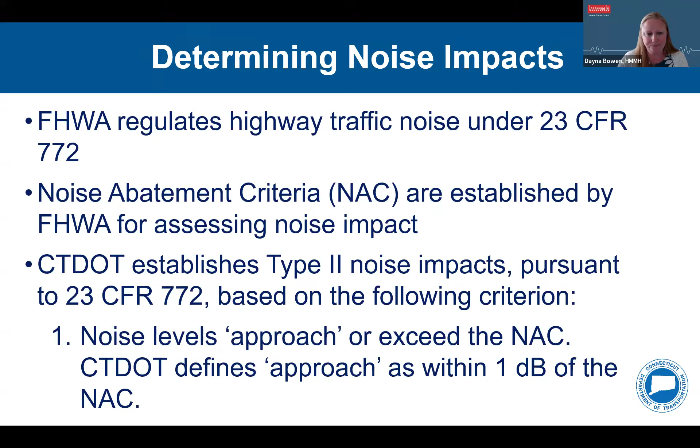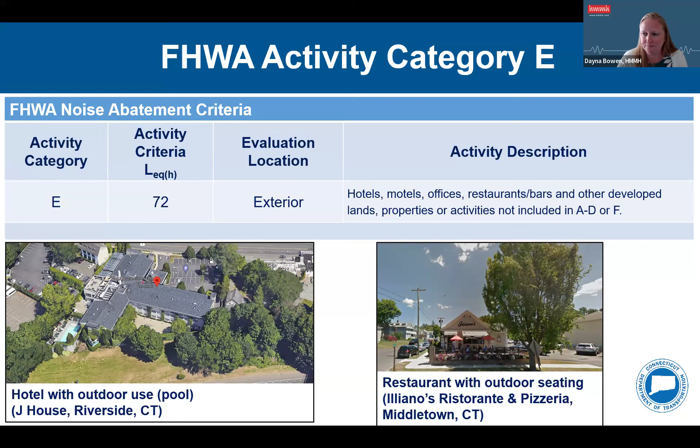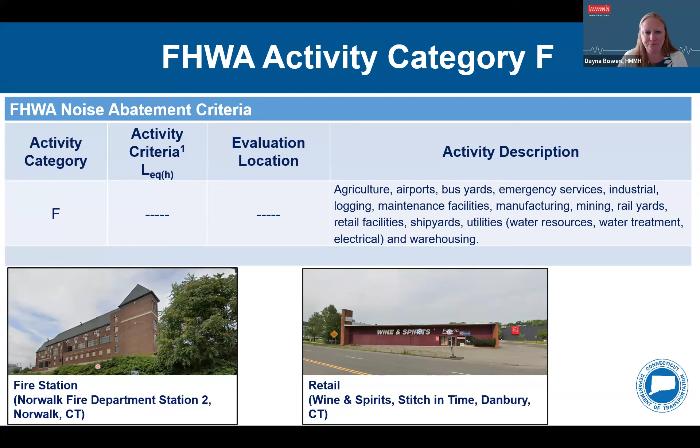Okay, so now I'd like to get into the details of the analysis. So what is a type 2 noise analysis? Federal highways revised their federal traffic noise regulation to allow for the control of noise along existing highways. Noise abatement that's constructed along existing highways is defined by federal highways as a type 2 project. Type 2 projects are not permitted on roadways that are already scheduled for a type 1 project or on roadways where a type 1 project has already been conducted.

A type 1 project in general is one in which there are roadway modifications, whereas a type 2 project does not include roadway modifications. To implement a type 2 project, a state first needs to conduct an analysis to identify locations of existing highway noise impacts. The intent is to then use the results of the noise analysis to identify a priority list of type 2 project locations. The priority list, as well as available funding and FHWA approval of the priority list, is required to then initiate a type 2 program.

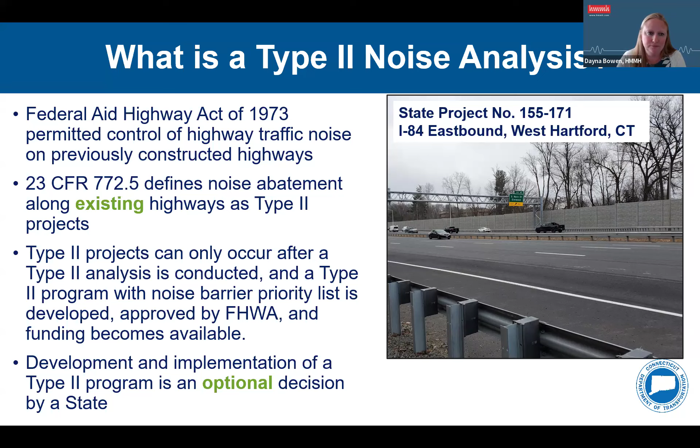FHWA does not require the development and implementation of a type 2 program. It's a strictly optional decision by a state to identify and address existing highway noise issues. Anna?

So here we see a timeline of the history of the type 2 program for Connecticut. A study was conducted in the 70s. The state was then able to move forward and implement a type 2 program. This previous program was suspended in the early 80s due to funding. Then with new legislation that was passed, it reopened the program for a few more years. It was then suspended a final time due to lack of funding. This program is now outdated, which leads us to today, presenting on the new updated analysis the department conducted.

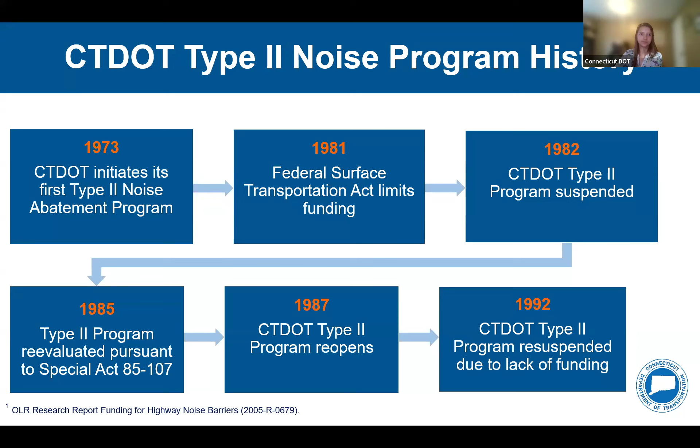Okay, so the department provided the consultant team with a list of 38 principal arterial highways to be included in the type 2 noise analysis. Principal arterials are generally roadways that serve through traffic and they have limited access. The list is generally comprised of limited access highways where highway traffic noise abatement could potentially be constructed. Local roads with numerous access driveways make an effective noise barrier very difficult to construct because of the frequent gaps necessary to maintain access. A noise wall needs to be continuous to effectively reduce noise levels.

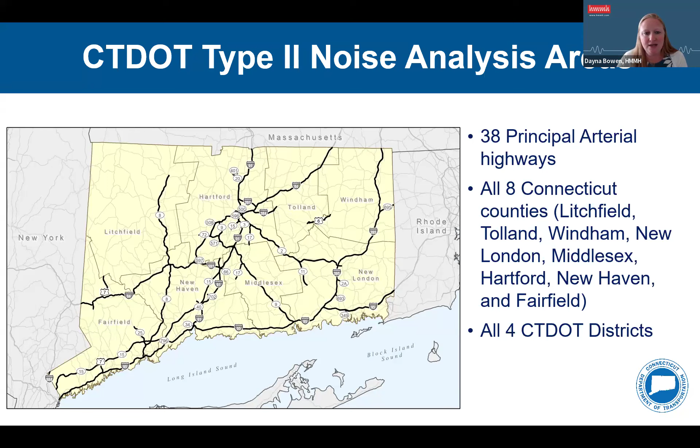The next slide provides a graphic demonstrating noise barrier length requirements to help understand. As a general rule of thumb, we like to say that to provide sufficient noise level reductions for receivers, a noise barrier should extend at least 4 times the distance between the last receiver and the noise barrier. That's just a general rule of thumb. You can think of noise barriers with multiple gaps for access driveways as short barriers that are not long enough to sufficiently block the highway noise.

So let's get into the noise modeling. Noise modeling was performed to evaluate existing highway noise impacts, as we said. And as we'll explain in the next few slides, the statewide noise modeling is preliminary and simplistic.

Specifically, the model does not account for changes in terrain, shielding from natural sources like hills and man-made sources like buildings. Standard lane widths of 12 feet per lane were assumed, and all lanes in a single travel direction were modeled as one roadway with a roadway width equal to 12 feet times the number of lanes.

It's also important to note that this simplistic modeling approach was taken due to the statewide scale of the project. Each site identified on the type 2 priority list will still need to undergo a more rigorous noise analysis.

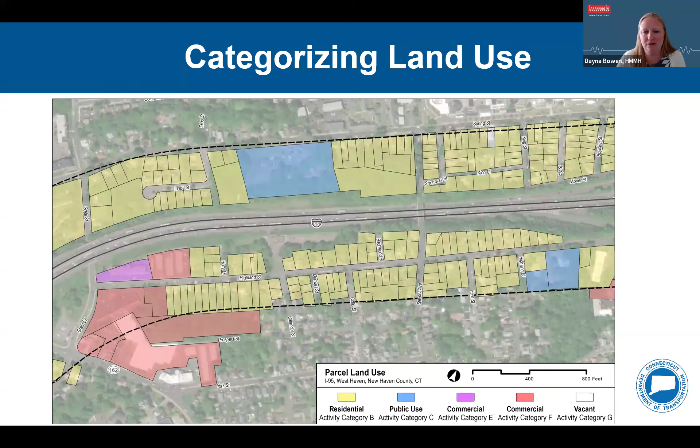So noise measurements were conducted in a total of 36 locations in the type 2 noise analysis areas. Locations selected for monitoring are intended to represent a good sample of the entire noise analysis area, covering a range of different roadway types and source receptor geometries.

The intent of the noise measurements was not to identify existing noise levels everywhere, but rather to obtain sufficient information to create a simplified or valid flat earth noise model approach and confirm that this flat earth model had an appropriate degree of accuracy so that it could be used to then identify existing highway traffic noise levels at all noise sensitive land use within the type 2 noise analysis area.

A flat earth model assumes that the roadway and noise sensitive land use are all at the same elevation and that there's no objects to block the view from the noise sensitive land use to the highway.

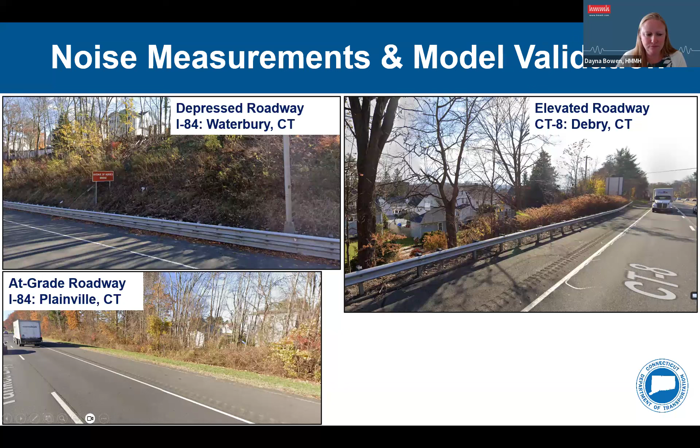So to help validate our flat earth approach, traffic volumes and vehicle classifications were counted during our noise measurements. The flat earth model included bidirectional roadway center lines and bidirectional traffic volumes classified by vehicle type, as well as posted speed limits. The vehicle types used in the traffic noise model include 5 types. We have autos, medium trucks, heavy trucks, buses, and motorcycles.

Whereas medium trucks are vehicles such as FedEx or UPS vehicles, as well as pickup trucks with the extra set of back wheels like dually pickups. Those are class 5. Heavy trucks are tractor trailers and other trucks with 3 or more axles, which includes classes 6 through 13. Buses can include commuter buses and school buses, which are class 4, and then motorcycles are class 1.

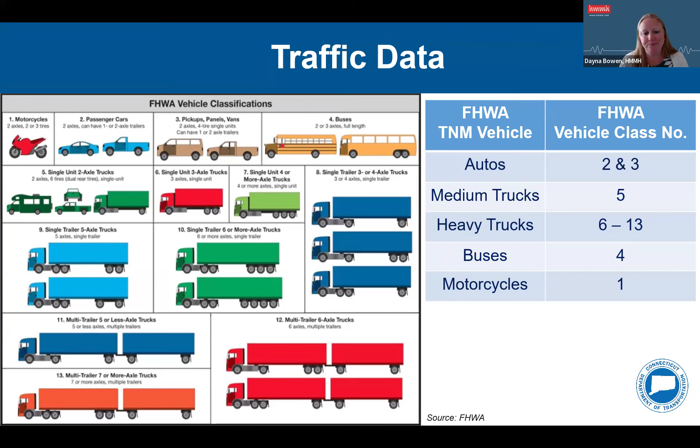The graph shows how traffic volumes sharply decreased once stay-at-home orders went into effect in March 2020 due to the COVID-19 pandemic. Therefore, modeling 2019 traffic volumes is considered conservative because more volume traveling at the posted speed limits, which is what we modeled by using the 2019 traffic, results in higher noise levels than less volume traveling at the posted speed limits.

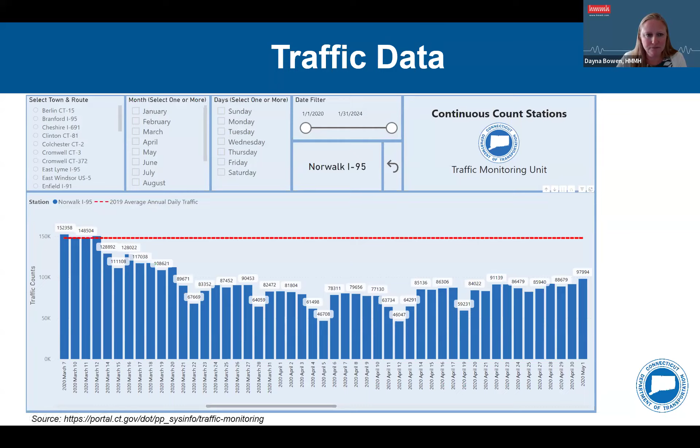The traffic data input to the model was then used to identify parcels where existing noise levels approach or exceed the applicable noise abatement criteria for the land use activity categories evaluated, which again were categories B through F. Noise contours were developed within 500 feet from the edge of travel in accordance with Connecticut Department of Transportation policy. Contours are only used for planning purposes. If and when funding is secured, detailed noise modeling will be conducted and contours will not be used to determine impacts. They're used for planning purposes only.

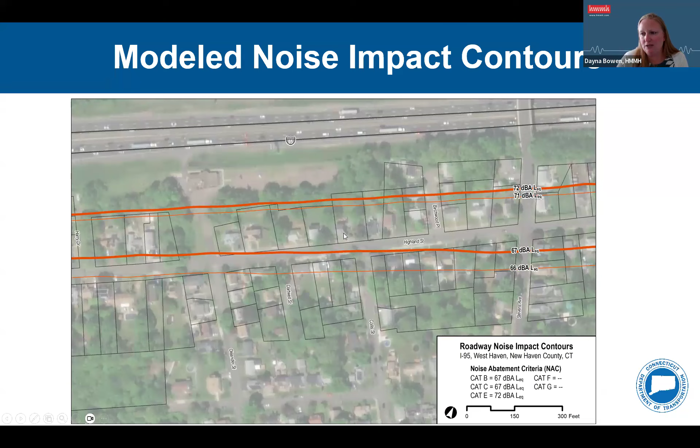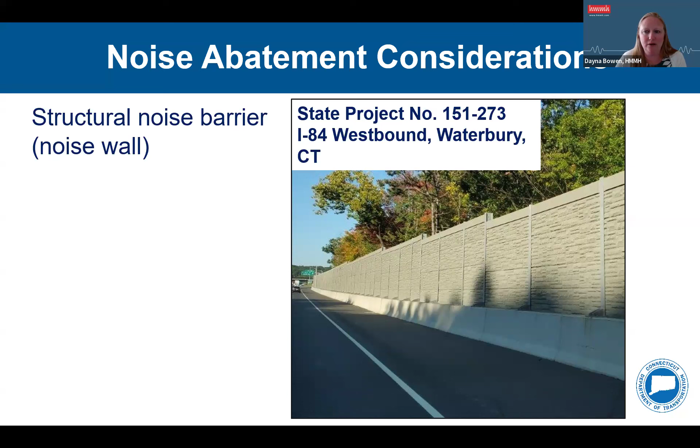So what kind of abatement did we consider? Once impacts are determined, the next step is to consider noise abatement. Noise abatement in the form of structural noise barriers or noise walls was primarily considered. Earthen berms are not typically constructed unless there's sufficient land area available or structural noise walls are not permitted, such as along the Merritt Parkway in Connecticut. The Merritt Parkway's guidelines prohibit the use of structural noise barriers.

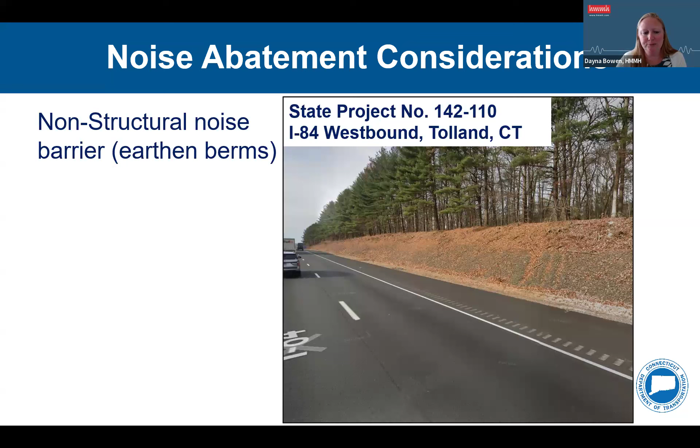Okay, so federal highways requires noise abatement to be feasible and reasonable. Otherwise, it cannot be funded for construction. There are 2 types of feasibility. We have acoustic feasibility that considers the level of noise reduction achieved by the abatement measure at impacted receptors, and engineering feasibility, which addresses whether it's possible to design and construct the abatement measure. For example, are there utilities that cannot be relocated without significant cost implications? Are there access driveways that need to be maintained that would degrade the effectiveness of the noise barrier like we talked about earlier?

Reasonableness evaluates how many receptors benefit. In other words, how many achieve a minimum established level of noise reduction, which Connecticut Department of Transportation has established to be 5 decibels. Reasonableness also evaluates the number of benefited receptors at which the abatement measure achieves the state's noise reduction design goal of 7 decibels or greater.

Reasonableness includes soliciting viewpoints of benefited property owners, and it also includes determining the cost of the abatement measure per benefit. So in other words, noise abatement that exceeds the state's cost effectiveness index of $55,000 per benefited receptor cannot receive federal funds for construction. This cost is calculated based on a unit cost of materials of $60 per square foot.

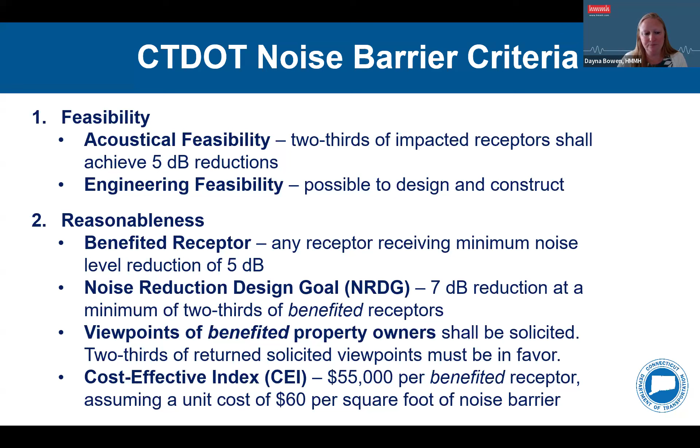The consultant team reviewed the noise impact contours for each county to identify where there are existing highway noise impacts and where noise barriers and earthen berms could potentially meet the department's criteria we just reviewed. Initially, areas with sufficient density of noise-sensitive land use impacted were identified. For example, in areas where there's 3 impacted homes, it's very difficult to meet the necessary feasibility and reasonableness criteria, especially that cost criterion.

Noise barriers were then evaluated in 130 areas at 4 different heights, 10 feet, 15 feet, 20 feet, and 25 feet in each location. These 4 heights were selected because they represent a reasonable range in heights that allowed the team to determine if a feasible and reasonable noise wall could be achieved. Most noise walls are at least 10 feet high, and this minimum was logical for the flat earth model approach. Lower heights are typically only effective where there's elevated terrain between the highway and the receptor, and you could take advantage of some of that terrain and create a lower panel height.

The team capped the height at 25 feet, knowing that barriers are less likely to be cost effective the higher they're constructed. And additional benefits are really no longer achieved for ground level first and second story outdoor use areas.

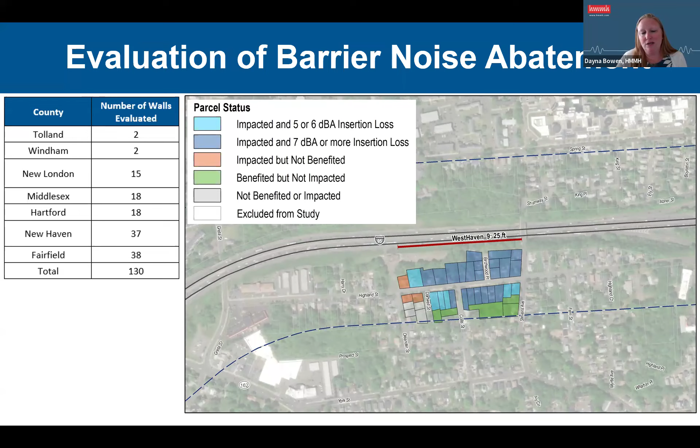So the federal traffic noise regulation requires prioritization of noise barrier areas that are identified. So to prioritize the barriers, the team developed an equation that considered the number of benefits, the date of development, the degree of impact, how much noise reduction could be achieved by the barrier, and the total barrier cost based on the department's unit cost of $60 per square foot.

The equation considers the number of benefits achieved by the abatement measure, the percentage of development that predates the highway, the average predicted noise level at the receptors to be protected by the noise wall, the amount of noise level reduction the barrier provides, and the total item cost based on the department's policy. Once the priority index values were calculated, they were assigned to each area to develop the priority list.

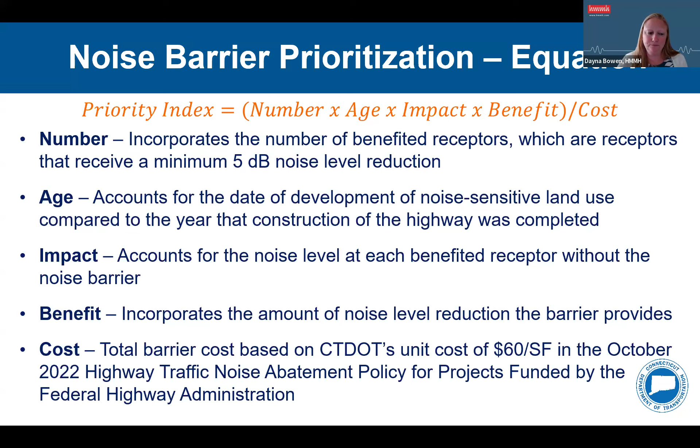So before initiating a type 2 program, one major step in the process is to secure the funding. It's important to note that the department does not have a dedicated funding program at this time. Also, in order for type 2 barrier areas to be eligible for federal funding in Connecticut, 25% or more of the adjacent development protected by the barrier must predate the construction of the highway. If a proposed barrier does not meet this criterion, it's not eligible for federal funding.